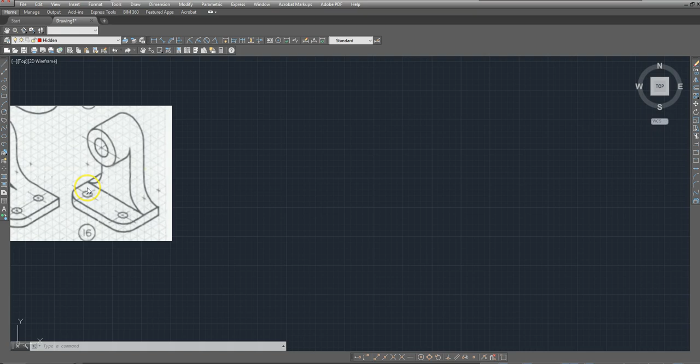Maybe that's not a good place to count. Let's see, there's a circle here, a circle here. This is 1, 2, 3, then 1, 2, 3, 4 that comes down. So going 1, 2, 3, 4, 5, 6, 7, 8, 9, 10, 11 - total height is 11. The depth is 1, 2, 3, 4, 5, so 11 by 5. The width is 1, 2, 3, 4, 5, 6, 7, 8. So 8 on the width, 11 high, and depth is 5.

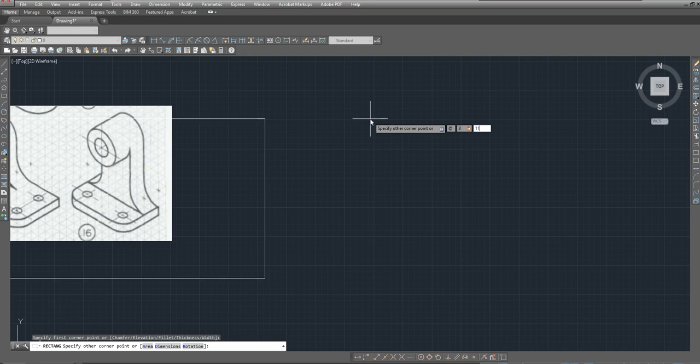So let's do the front view first. I'm going to switch this over to my regular line layer, continuous line. I need the rectangle command, and I'll draw a rectangle that is 8 comma 11. So that front view is going to fit in this box.

Now I've got a 1-inch high work base, so I'm going to come up here. See how I click the line command, touch here, and OTRACK up. I type in 1, enter, and draw a line across. So there's that base plate there.

Then this comes in 1, 2 on each side. So I'm going to draw a line from here, come over 2, come up, line over here, come over 2, draw a line up. Then trim - from this, get rid of that and that.

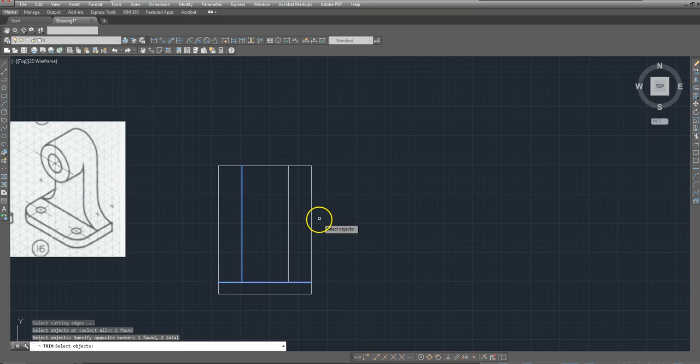Okay, so it's all going to fit in there. Now I've got to get rid of that corner and that corner. So trim, enter, to this line and this line, enter, get rid of that and that.

Escape, escape. Okay, the radius of this round is 2, so I want to use my fillet command. Fillet, R for radius, 2, and come here and click, click, enter, click, click.

Escape, escape. Now I'm going to get my circle command, and right on top of that, draw a circle for that whole face. If I touch here, I get the center mark, and I just want to go like that.

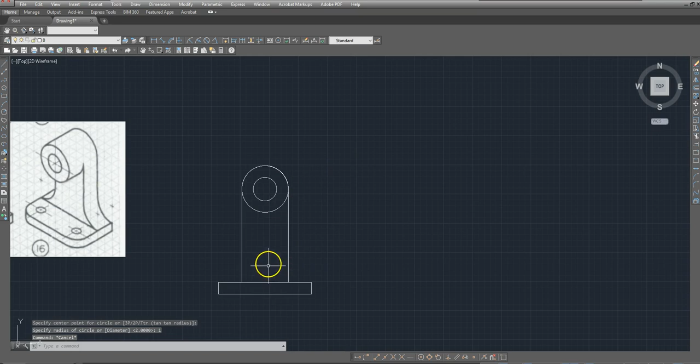Now I want to do another circle in the middle that has a 1-inch radius. Click, R, radius 1. Now I have to do the fillet here to make it flare out, and the radius is 2.

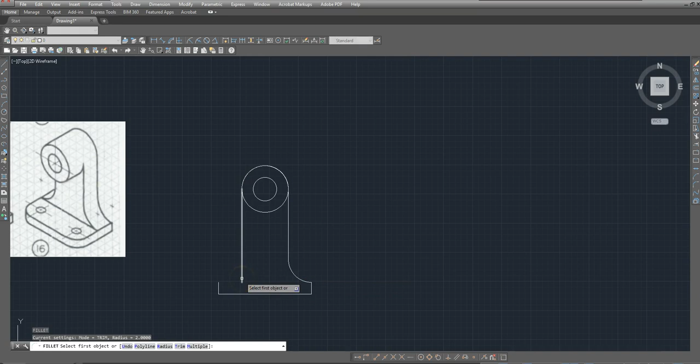So get my fillet command, R, enter, 2, enter, click, click. Let's see if this works. Oh, escape, escape - I've got to draw that line back in.

Then I'm going to hit fillet again. It's already set up, ready to go, so I just have to click, click. And then I got to draw that line back in again.

Okay, so there's the front view. Now I have to put in the hidden lines for these 2 holes that are drilled. So I get over to the hidden line command.

Are you thinking what I'm thinking? Is this not 11? Is it 10? I think it's 10. But anyway, this comes over 1.5, 0.5, comes up 1.

The diameter is 1, so I'm going to copy this over 1.

And then this I'm going to mirror, so I get a copy on this side. So I highlighted those 2 red lines, hit MI, enter, that's the shortcut for mirror. Click here, go down, and hit enter.

Now I got to mirror the other side. So I think the height here is not 11, I think it's 10. So watch what I'm going to do.

I'm going to get that circle and that circle, right? Watch this. I'm going to move, M, enter. From this center mark, I'm going to come down 1 inch.

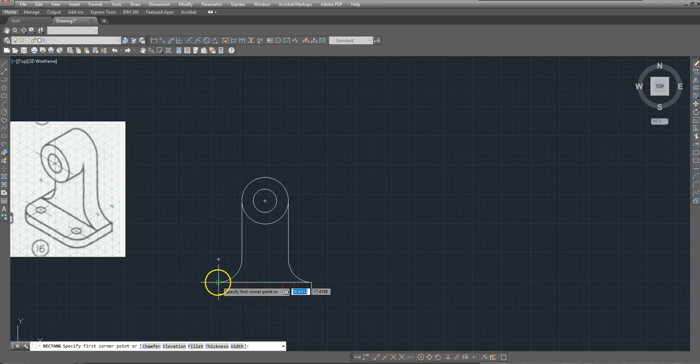I'm going to come up from here, right around here, and I'm going to draw a rectangle that's at 8, 5. So there that is.

Okay, I can use my fillet command to get a 1.5 inch radius. R, enter, 1.5, enter, here and here, enter, here and here.

Okay, I'm going to put my holes in, so I grab the circle command, come here, and point, and the radius is 0.5, and I want to copy that from that midpoint to the midpoint for that circle, which is right there. So there are the 2 holes right there.

Now we got to do the back piece. This is tricky. So first of all, we got this cylinder right in the middle, that is 4 deep, right in the middle.

So I want to get a line command, and I'm going to come over 2, because it's 4 diameter, so I want to come from the midpoint over to the right 2. Come down 4. Come over here 4. Come back to here like that.

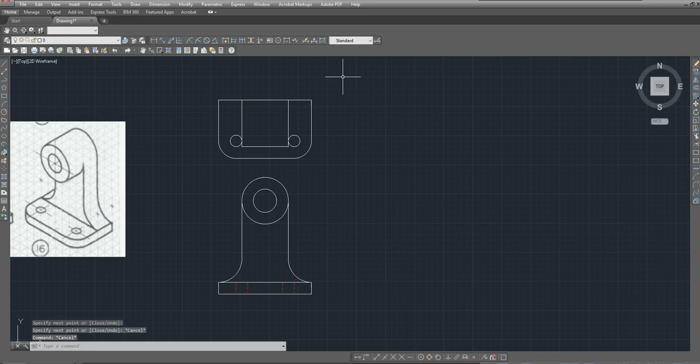So there's the top of that cylinder, okay? But I have to show these lines, this edge there. So watch. From here, I'm going to come down 2 with my line command. Draw that one. And draw that side in.

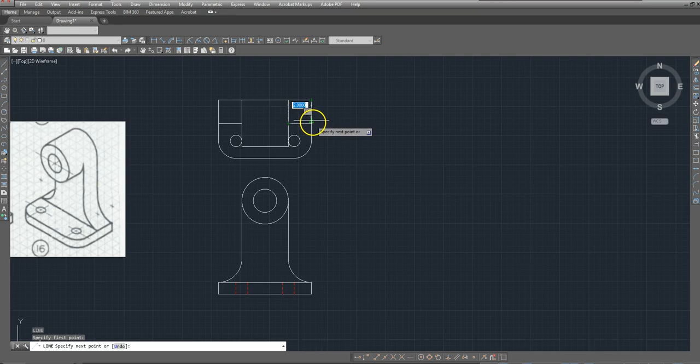It doesn't like the way I'm doing it. So I'll tell you what I'm going to do. I'm going to cheat. I'm going to mirror that line from the midpoint to the other side.

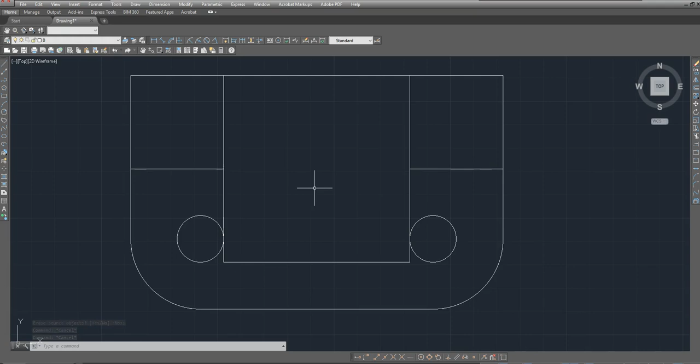See, once you learn the tools, then you're going to have to just create. You can make it up as you go along in terms of putting the puzzle together so you get the right top, front, right side view.

Okay, now I got to put all my hidden lines in. So let's go to the hidden line layer. I got to draw this hidden line in here, because that edge underneath there has to be indicated.

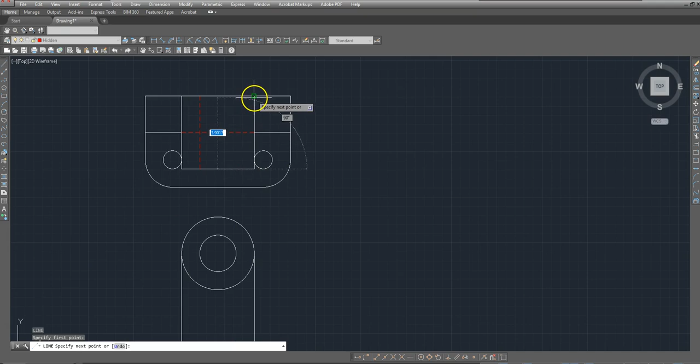But I also have hidden lines for the hole in the front clock face, let's call it, or this opening. And I got one here too. See how I'm using OTRACK to do everything for me?

So there's the top, there's the front. Now let's do the right side. Right side is 10 by 5. So switch it over to the 0 layer. Get my rectangle command. Come over and go at 5, 10.

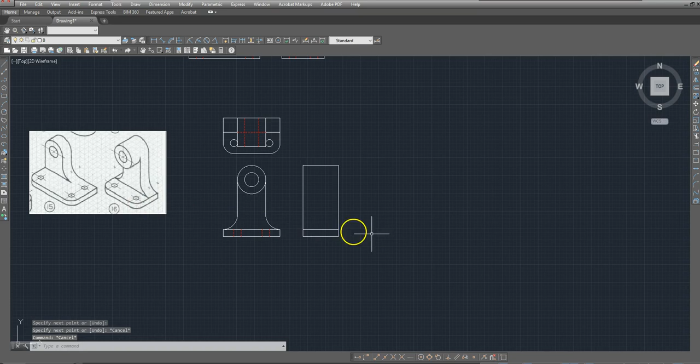Okay, so now you're going to come here and you're going to draw that line because there's that edge you got to show. Okay, this comes over 4,

comes down to here, and goes back 2.

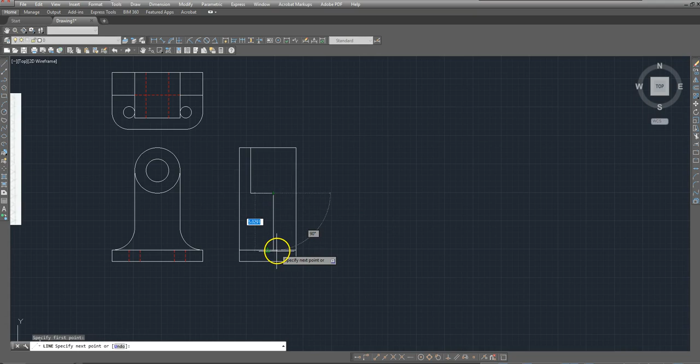And then we get a line that goes from 2 down to there. Now, I don't see that. Look at this. See how there's no crack there? Oh, but it does come up 1 inch.

So now I got to go from here and draw up 1. Yeah, I know, but you have to represent it.

Okay? So we're going to cut, or trim rather, from this line and this line. We're going to trim that out. Escape, escape.

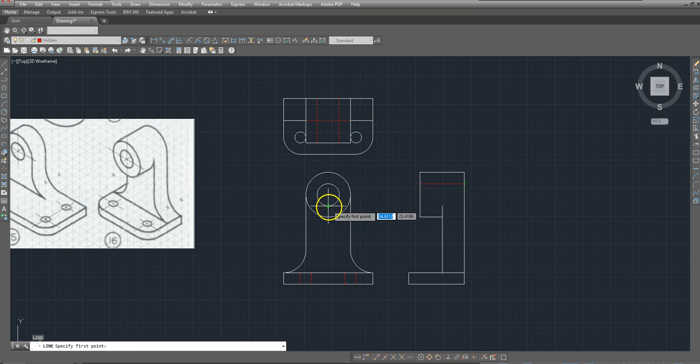Now let's put in our hidden line. And here we go. We're going to touch here, like that. Put this hidden line in.

Okay, and now this is back 1 inch. So we come back from here, 1 inch.

No, thank you. Line command, touch here, track over 1. And then we copy this line that way 1 inch.

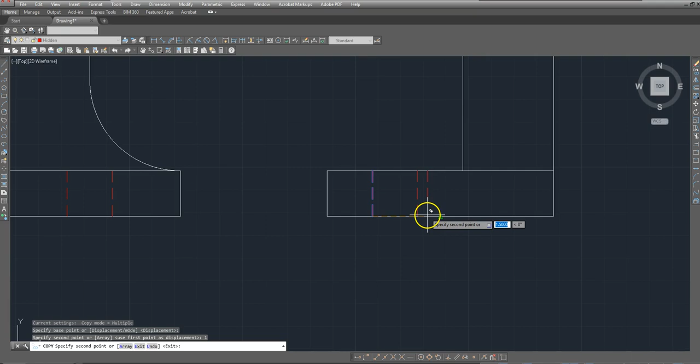And there is the top, front, and the right side view of number 16.